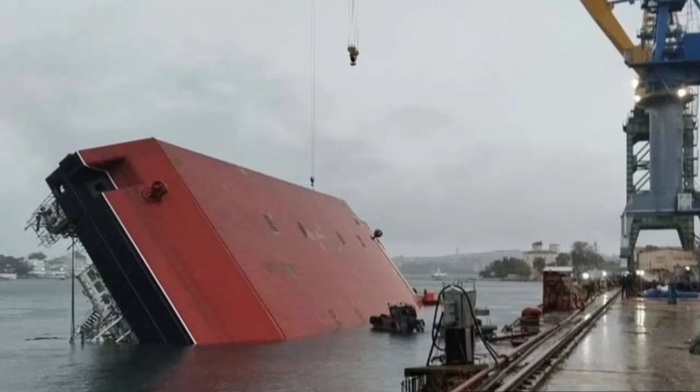October 27, 2025. Sevastopol's Yuzhnaya Bay lay calm as the PK-700 crane, a colossal steel giant worth $92 million and meant to serve the nation's nuclear fleet, began an inexplicable, slow tilt. 10 minutes later, it was gone, submerged, with chaos erupting on shore and key workers trapped beneath.

Was this a tragic accident, industrial neglect, or something hidden in plain sight? What truly caused Russia's most expensive maritime disaster in years?

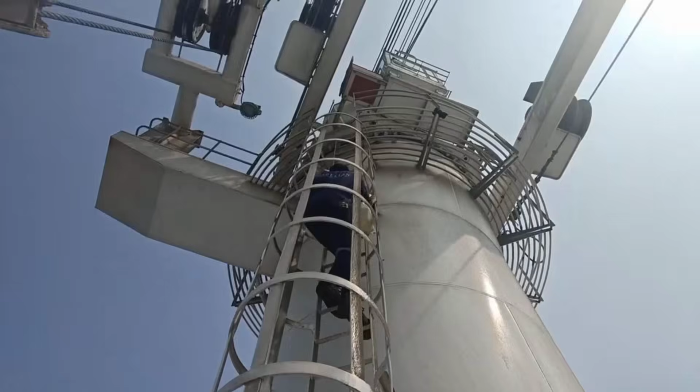At 3:30 in the afternoon, the PK-700 floats steady in Yuzhnaya Bay, its steel hull reflecting the pale afternoon sun. On board, workers and engineers move through routine checks, unaware of the slow change underway. The first sign is subtle, a gentle list, barely noticeable to those on deck. A dockside camera catches it, the waterline creeping higher against the port side, just a few centimeters at first.

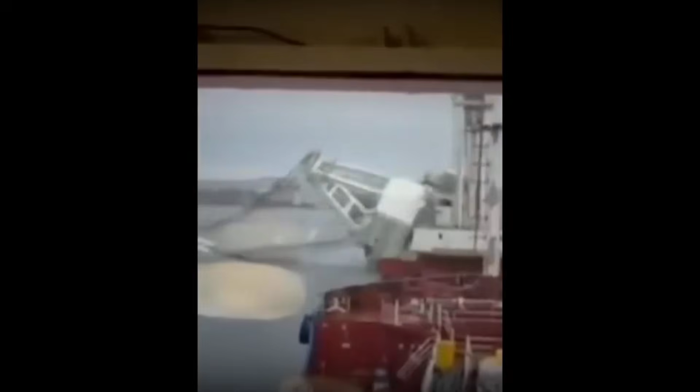By 3:32 in the afternoon, the tilt has grown. Eyewitnesses on the pier trade glances as the crane's tower leans further from vertical. One man shouts, pointing at the growing angle. The 350-ton test load still hangs from the crane's main hook, suspended over the bay.

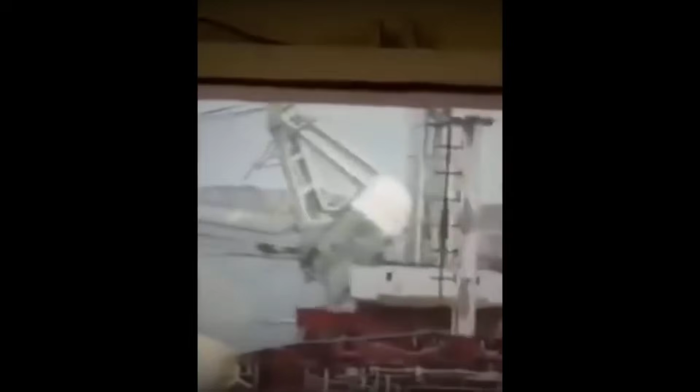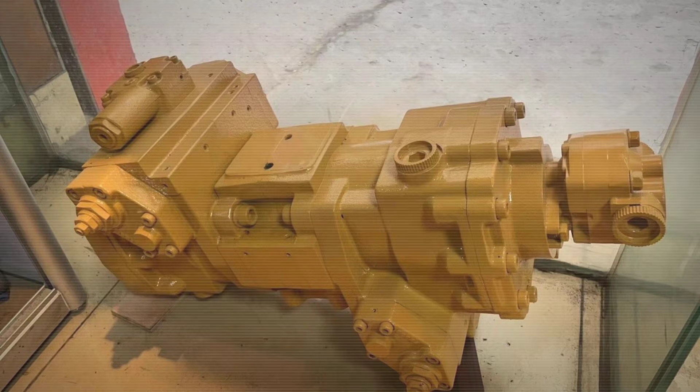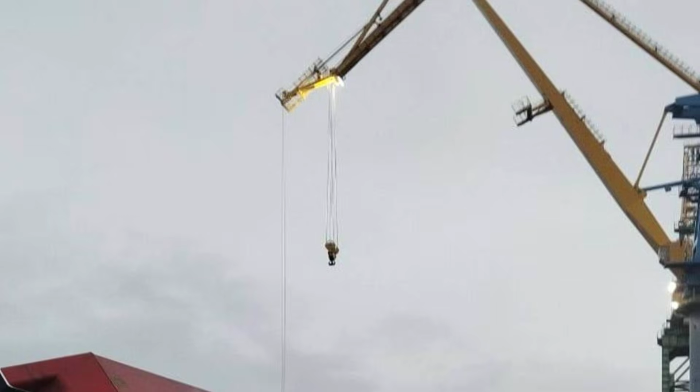Crew members step back from the edge, some pausing to stare at the horizon as the sensation of movement becomes unmistakable. At 3:34 in the afternoon, alarms begin to sound. The list accelerates. On the upper deck, a technician grabs a radio, calling for instructions. Below, in the machinery spaces, the hum of pumps is interrupted by the metallic groan of shifting ballast. The vessel's massive tower, designed to lift submarines, now works against its own stability.

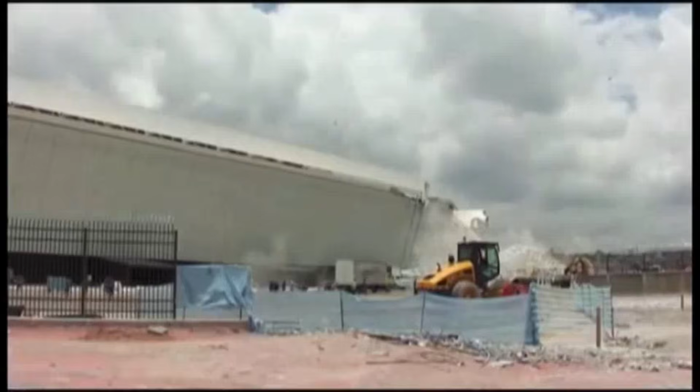By 3:36 in the afternoon, the tilt is visible from across the harbor. Cell phones come out. Some workers scramble across the sloping deck, bracing themselves against railings. Dock workers on shore move back, shouting warnings. The angle of heel now exceeds what any observer would call safe. The test load still dangles, swinging slightly as the vessel's orientation changes.

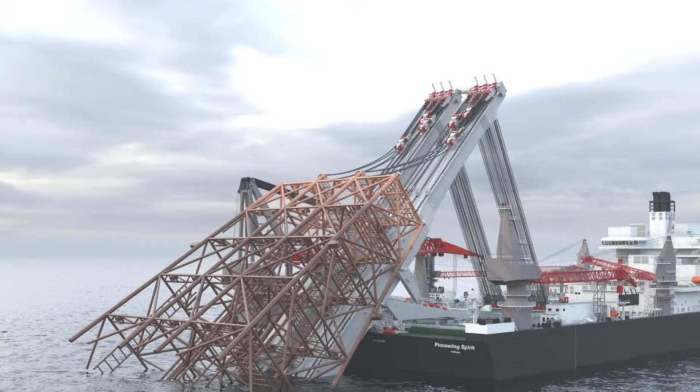At 3:38 in the afternoon, the list passes a critical threshold. The deck is at a steep angle, and movement on board becomes dangerous. Eyewitnesses describe the sound of metal creaking, a deep, resonant warning. Crew on the main deck begin to abandon their posts, some slipping, others helping colleagues reach ladders and gangways.

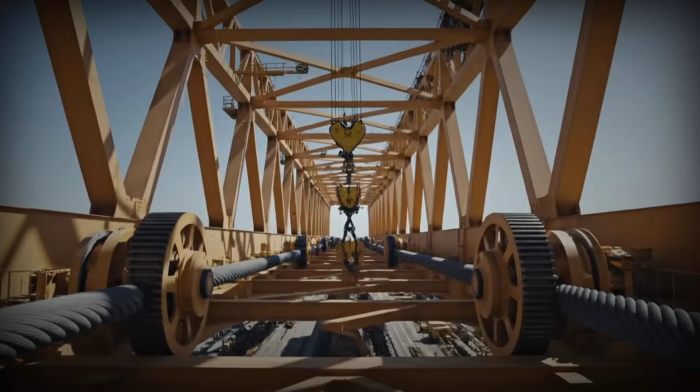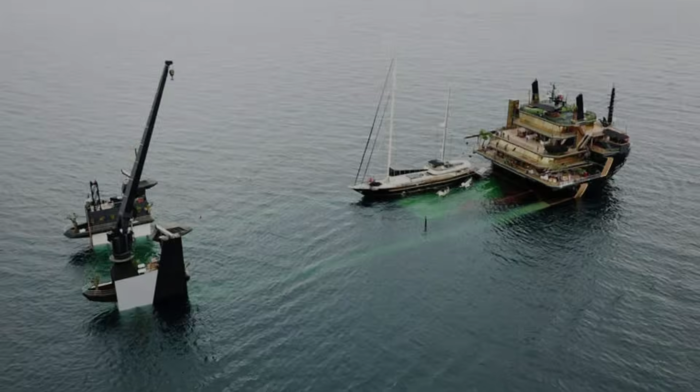At 3:39 in the afternoon, the inevitable happens. The massive tower, once upright, crashes into the water with a deep, echoing splash. A wave rolls across the bay, slapping against the piers and sending a spray over the nearest dock. In less than 10 minutes, the PK-700 has gone from routine testing to disaster.

The harbor fills with the sound of alarms, shouts, and the distant wail of approaching sirens. The vessel's steel hull, now half submerged, becomes a stark silhouette against the calm water. Onlookers, silent and stunned, watch as chaos unfolds in the heart of Sevastopol's naval yard.

Within seconds of the tower's crash, the pier side erupted in confusion. Shouts rolled across the water as onlookers, including dock workers, shipyard staff, and a handful of naval conscripts, strained to make sense of what had just happened. The air filled with the sharp crackle of radios as Port Authority dispatchers relayed urgent calls for assistance.

A flurry of small craft, some barely more than skiffs, pushed off from the wharves, engines sputtering as crews steered toward the half-submerged hull. On the quay, a cluster of engineers and supervisors gathered, their faces drawn and pale. Some pointed toward the listing crane, gesturing wildly as if hoping to reverse the disaster with sheer will. Others fumbled for their phones, calling colleagues or recording the aftermath in stunned disbelief.

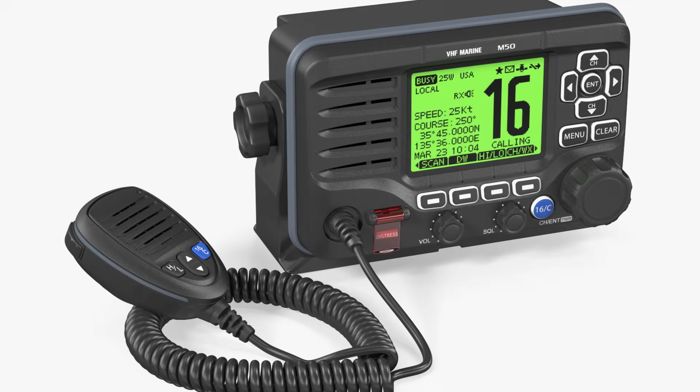The bay, moments before calm, now churned with the wakes of rescue boats and the distant wail of sirens threading through the harbor haze. Radio traffic grew dense. Port officials barked orders for all available vessels to assist. A tug captain's voice, thick with urgency, cut through the static.

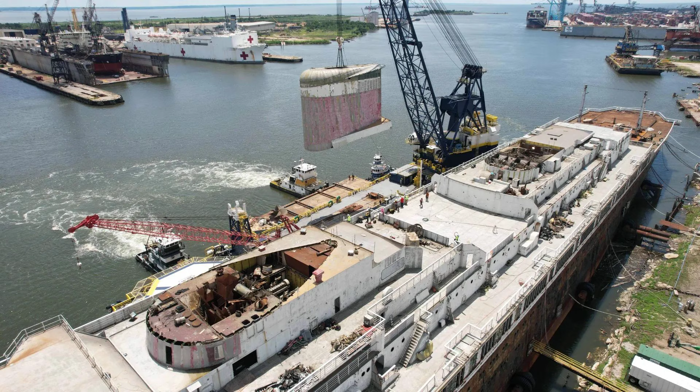"All hands prepare for recovery. There are people in the water."

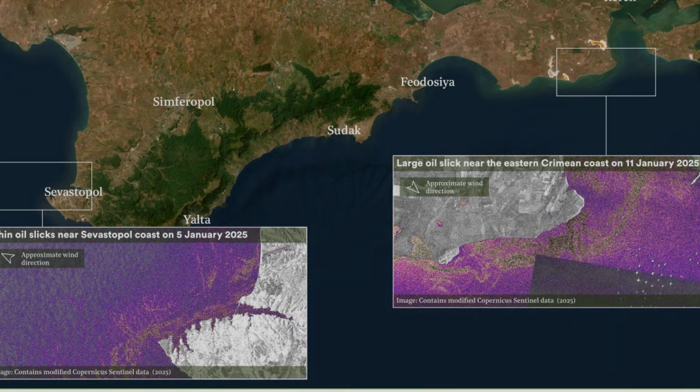The first responders, a mix of harbor police and shipyard crew, reached the scene within minutes, weaving between drifting debris and oil slicks spreading from the hull. Some boats circled cautiously, searching for survivors or anyone clinging to the twisted railing. Others drew up alongside the wreck, their crews calling names and scanning the water for movement.

On the shore, groups of workers stood frozen, some clutching hard hats or jackets, others simply staring. The spectacle of the massive crane lying broken in the bay seemed impossible to process. Rumors rippled through the crowd, questions about sabotage, a freak accident, or something worse. But there was little time for speculation as emergency vehicles crowded the access roads, blue lights flashing while paramedics and fire crews rushed to the water's edge.

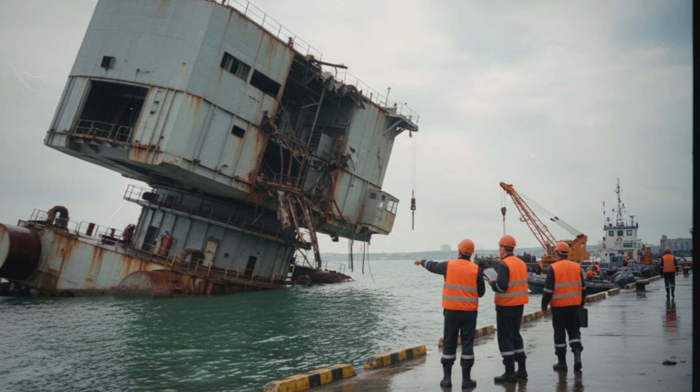The sense of order that usually governed the naval yard had vanished. In its place was a raw, unsettled energy, with people running, shouting, and improvising as they tried to help. No one yet understood what had caused the collapse. In the chaos, the only certainty was the scale of the disaster, and the knowledge that nothing in Sevastopol's harbor would be the same again.

Construction of the PK-700 Grigory Prosyankin began in November 2018 at Sevastopol, a shipyard with roots stretching back to the days of the Russian Empire. The project launched with high expectations, a heavy lift vessel designed to support the Black Sea Fleet's most demanding operations.

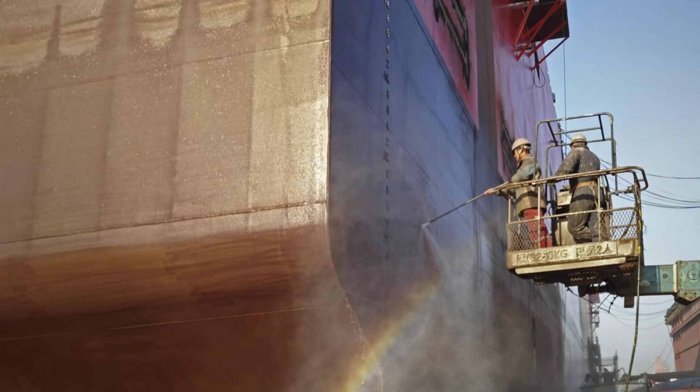But by early 2025, after 7 years of fits and starts, only about 65% of the crane was finished. The hull, meant to gleam with fresh paint, instead wore streaks of rust. Patches of primer showed through along the deck, and unfinished welds traced the outlines of missing modules. What was supposed to be the pride of Sevastopol harbor became a daily reminder of missed deadlines and broken promises.

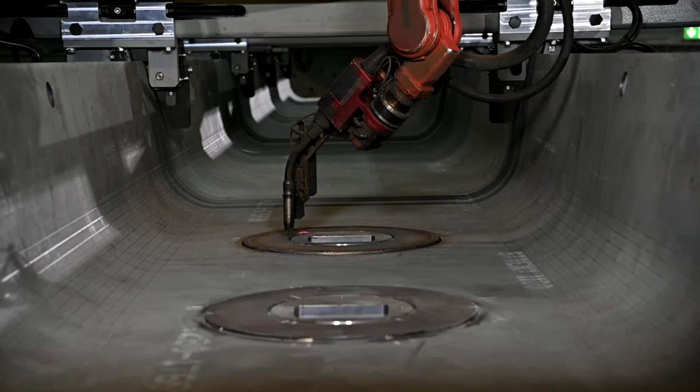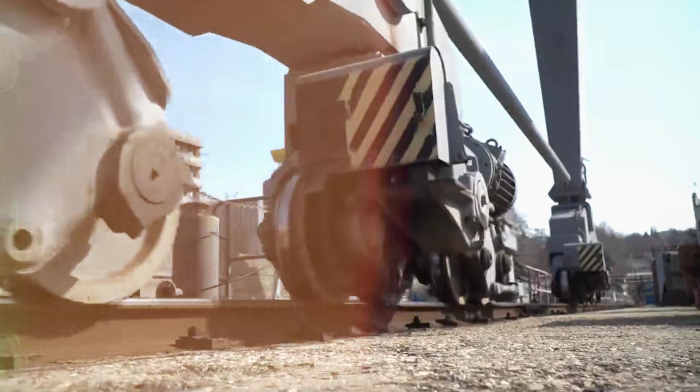Inside the shipyard, engineers and laborers faced a revolving door of problems. Funding arrived in unpredictable bursts, often too late to secure critical components. Official records show that between 2019 and 2024, the project halted at least 3 times for lack of materials or overdue payments. Each pause brought layoffs and departures. Experienced welders and electricians left for more stable work, taking their expertise with them.

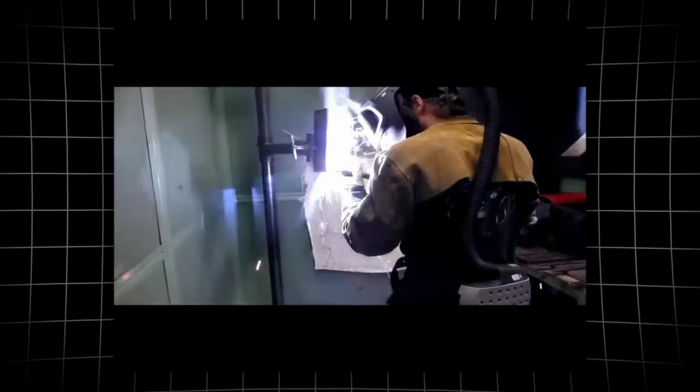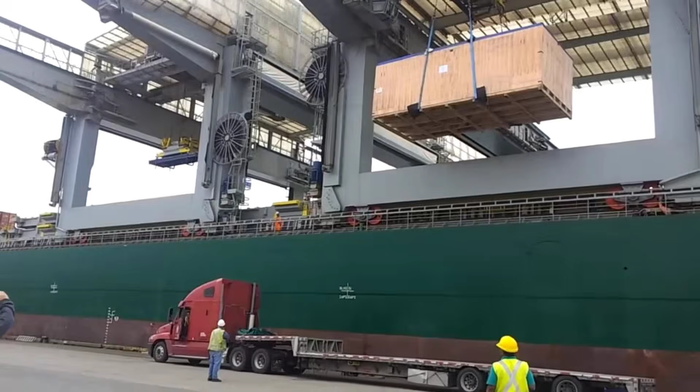By 2023, internal memos described the workforce as stretched thin and constantly changing, with new hires learning on the job under pressure to catch up. A shipyard engineer who agreed to be interviewed described the atmosphere in blunt terms. They said they were always behind. Every month, another deadline. Parts arrived late, or not at all. Sometimes they had to improvise repairs just to keep moving.

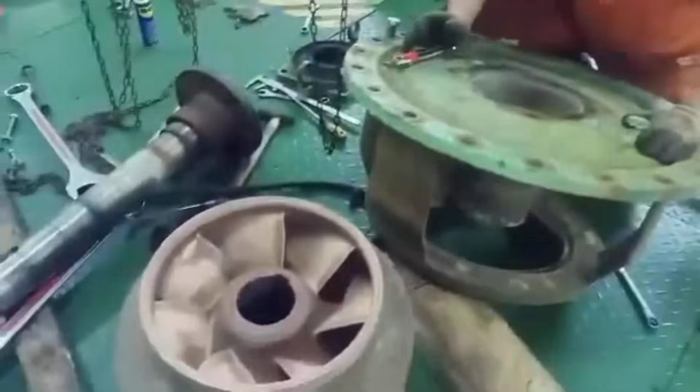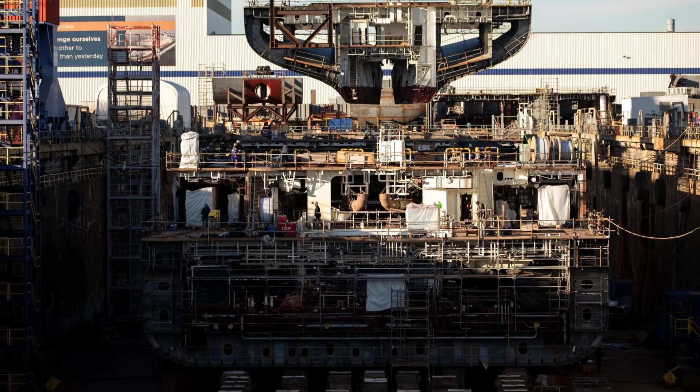It was never enough. Payroll logs from the winter of 2022 show overtime hours spiking, yet progress lagged far behind the official schedule. The engineer pointed to the ballast system as a particular worry. They said problems with pumps and valves had been flagged more than once. Maintenance was delayed because there were no spare parts, or the right people were not available. Those tanks were supposed to be checked and tested, but sometimes the paperwork was signed before the work was finished.

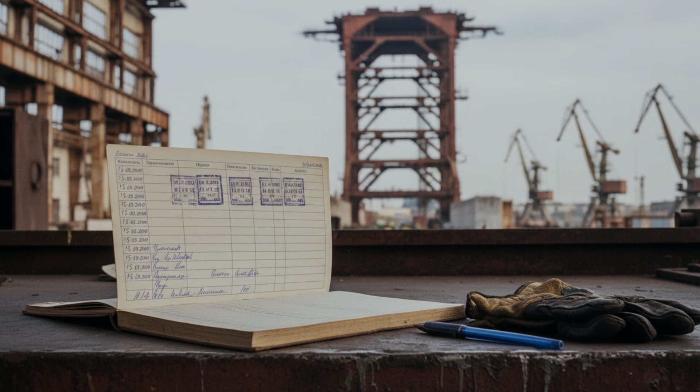Audit reports from the shipyard management confirm that safety milestones were repeatedly skipped or rescheduled. Project schedules from 2021 and 2024 highlight key safety reviews marked as incomplete or pending approval. In one instance, a pressure test for a ballast tank was delayed by 6 months, with no follow-up inspection recorded.

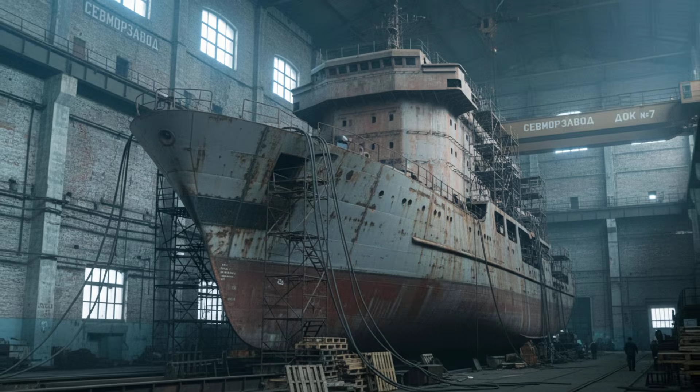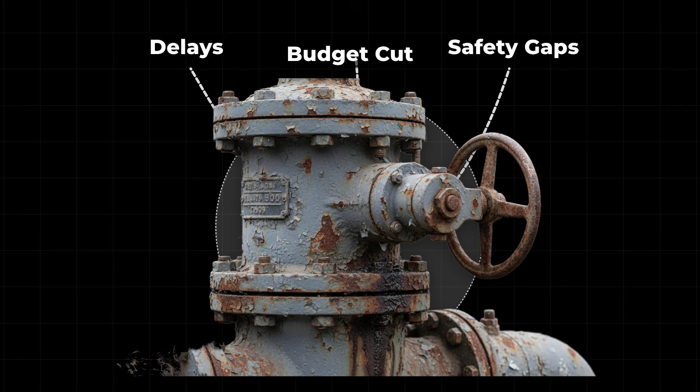By the time the PK-700 rolled out for its final round of tests, the vessel's unfinished look told its own story, a product of chronic underinvestment, a workforce in constant flux, and mounting pressure to deliver at any cost. The technical risk that haunted the project's early years would soon become all too real.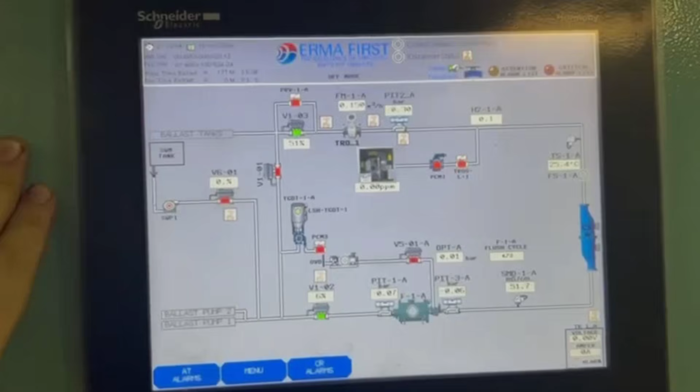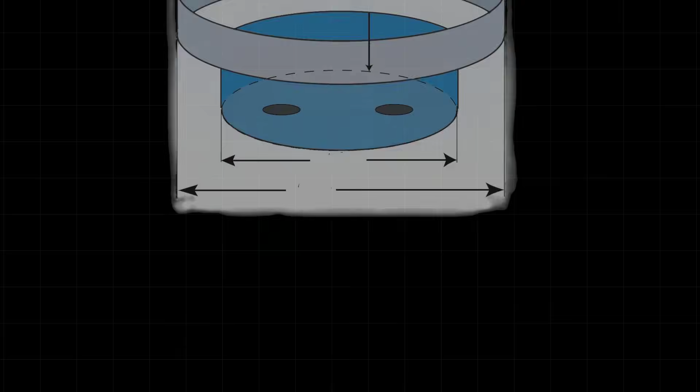But on October 27th, the system did not respond as designed. At 3:34 p.m., with the 350-ton load suspended, the first alarms sounded. The control panel flashed a warning. One of the main ballast pumps failed to activate when commanded. Operators initiated a manual override, but the display showed no change in tank levels. Ballast tank number 3, located on the port side, was supposed to fill rapidly to counteract the crane's heel. Instead, water remained trapped, and the vessel's list continued to grow.

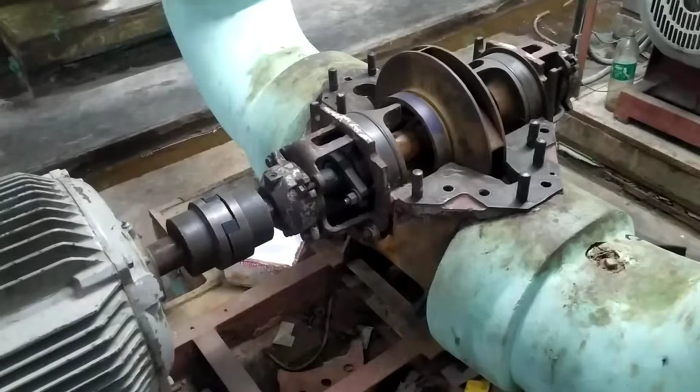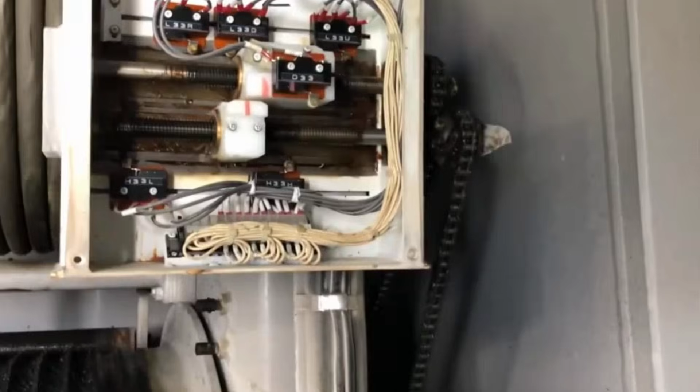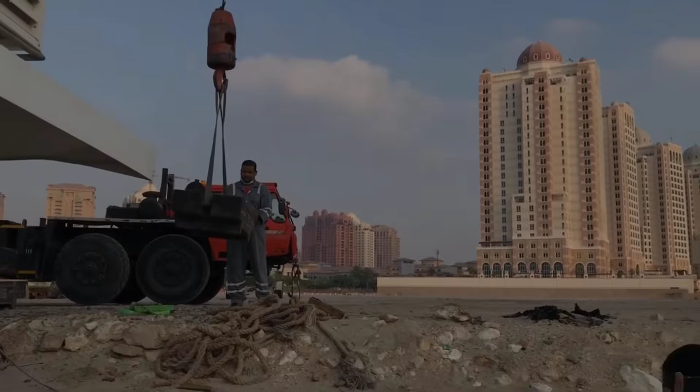Crew in the machinery spaces reported a metallic rattle from the pump housing, followed by silence, a sign that the motor had stalled or the valve was stuck closed. For the next 90 seconds, the control team cycled switches and radioed engine room staff to check fuses and circuit breakers. The vessel's programmable logic controller logged repeated attempts to start the pump, each ending in a fault code. Meanwhile, the angle of heel increased past safe operating limits.

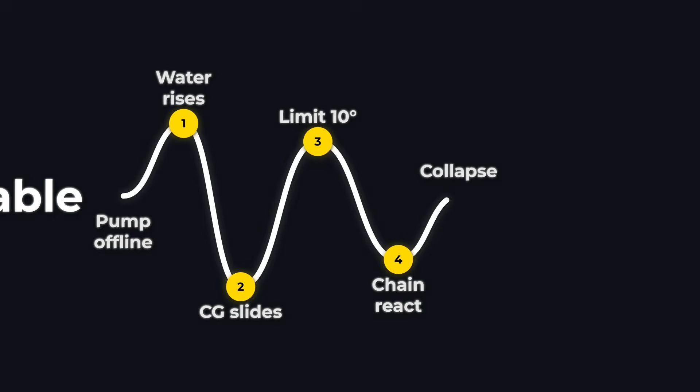Standard procedure called for immediate test suspension and rapid lowering of the load, but the shifting center of gravity left no margin for error. The suspended block, acting as a massive pendulum, pulled the vessel further off balance with every degree of tilt. On deck, technicians could feel the change with each passing moment. The floor beneath their feet slanted more sharply, and the sound of water sloshing inside the hull grew louder. The vessel's righting moment collapsed as the imbalance worsened.

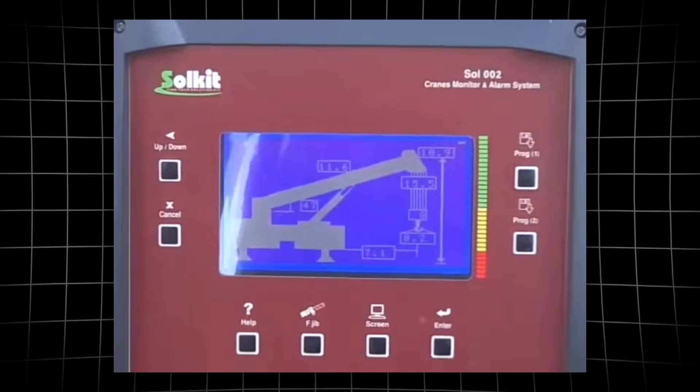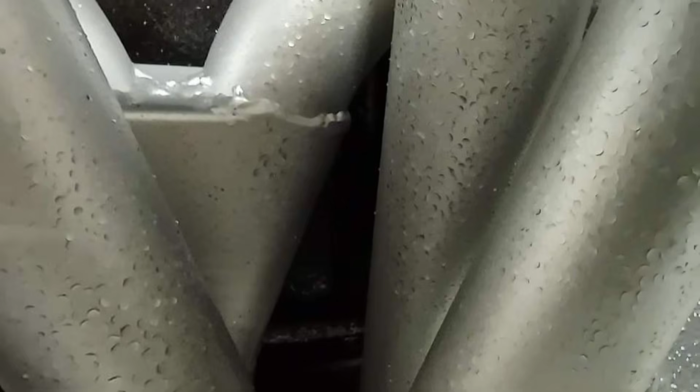In the control room, one operator shouted over the alarms, demanding the test be aborted. But the system's feedback remained unchanged. Tank number 3 was not compensating, and the vessel's fate was sealed. By the time the tower crashed into the bay, the mechanical cause was clear: the failure of a single ballast pump, combined with the inability to redistribute water, allowed the center of gravity to cross the point of no return.

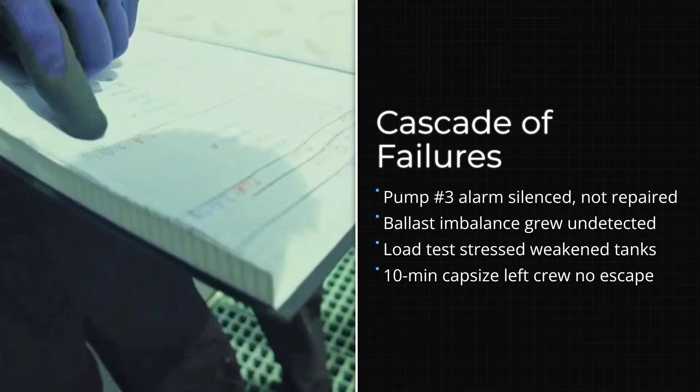Within minutes, a technical anomaly had become a full-scale disaster, traced to a system that had been flagged for maintenance delays and incomplete checks. The machinery logs, alarm histories, and schematic overlays would later become central to the official investigation. But for those on board, the disaster unfolded in real time. One failed pump, one stuck valve, and no way back.

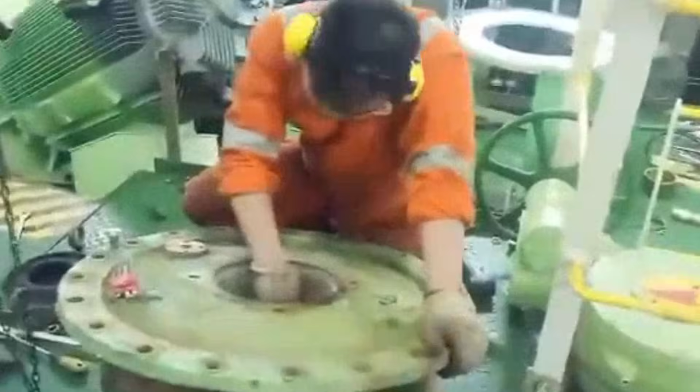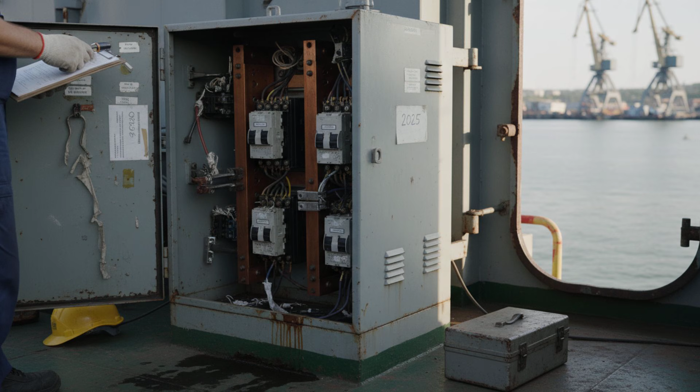Two men did not return home that evening. The electromechanic, a veteran of Sevastopol's workshops, was last seen below deck, working near the main power distribution cabinet. The sailor, assigned to the crane's maintenance crew, had been preparing emergency gear in the machinery space just minutes before the alarms sounded. As the vessel tilted, both were trapped beneath heavy steel and rising water.

Their names quickly spread through the shipyard. Colleagues described them as steady hands, men who understood the risks of unfinished machinery, but showed up every day regardless. On deck, chaos reigned. Over 20 workers scrambled to escape the slanting surface, some slipping into the cold bay, others helping injured co-workers toward the rails.

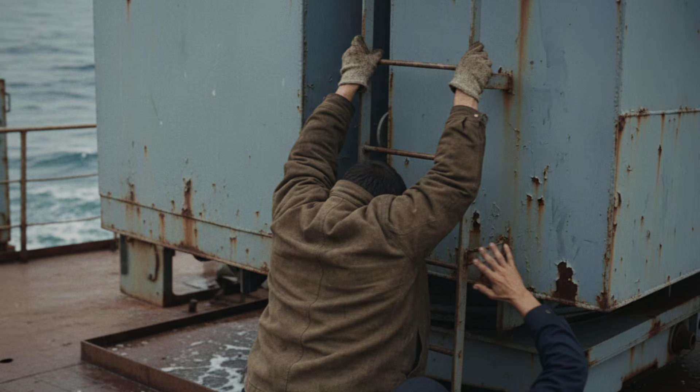Seven were taken by ambulance to the city hospital, suffering broken bones, deep bruises, and shock. A survivor, his arm in a sling, later told local reporters that there was no time to think. The floor was moving, alarms everywhere. He remembered grabbing a friend's jacket, pulling him up the ladder. Then the water came in.

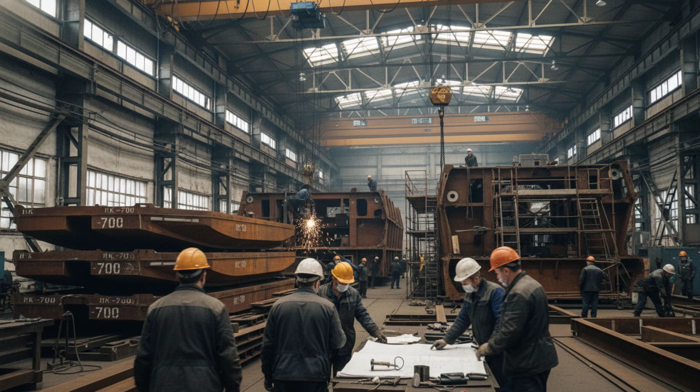Family members gathered at the hospital's entrance, searching for news amid the confusion. The wife of the electromechanic, her voice trembling, recalled the last message she received, a brief text promising he would be home for dinner. In the days that followed, union representatives and city officials offered condolences, but the sense of loss ran deeper than words.

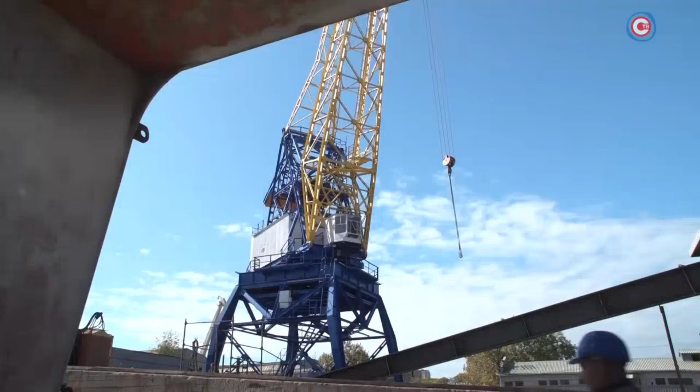The disaster was not just a technical failure, it was a rupture in the lives of dozens of families, each grappling with the sudden absence of a father, brother, or friend. For Sevastopol's shipyard community, the cost of the PK-700 collapse will be measured not in steel or rubles, but in empty chairs and unanswered calls.

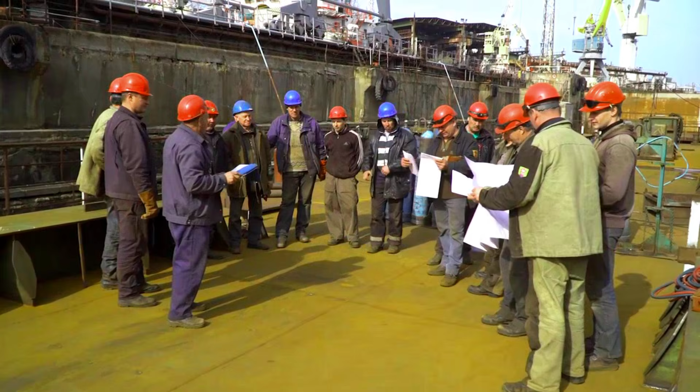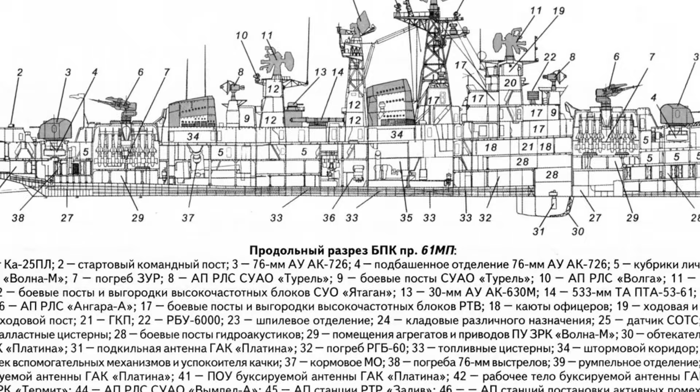On October 29, 2025, investigators from the Russian Investigative Committee arrived at the Sevastopol shipyard, carrying sealed folders and a mandate to uncover what went wrong. Within hours, the collapse of the PK-700 was no longer just a workplace tragedy. It became a criminal case. The lead investigator, a veteran of industrial accident probes, began with the paperwork.

Inspection checklists for the ballast system showed missing signatures and incomplete test records. Several safety milestones, required by maritime regulations, were marked pending or simply left blank. Maintenance logs for the failed pump referenced repairs that were scheduled but never carried out.

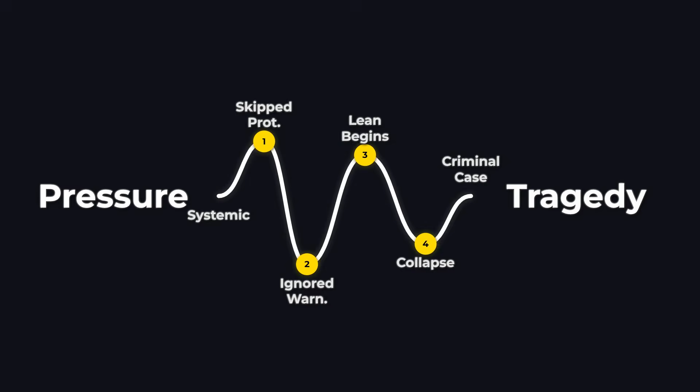Statements from the engineering committee revealed a pattern: pressure from above to meet revised deadlines, even if it meant skipping protocols. Internal memos, later obtained by the authorities, documented warnings about the ballast tanks and the risk of running tests without full system verification. One memo dated just 10 days before the disaster cautioned against proceeding with the load test until all safety checks were completed.

It went unheeded. By the end of the week, the committee issued a preliminary finding. Negligence, not sabotage or outside interference, had set the disaster in motion. The criminal inquiry focused on shipyard management and commissioning officials who authorized the test despite unresolved technical concerns.

Official statements pointed to a technical anomaly, but the documents told a clearer story. Corners were cut, and the cost was paid in human lives. The investigation findings would soon shape the course of salvage and recovery, and determine who would be held to account for the loss in Sevastopol's harbor.

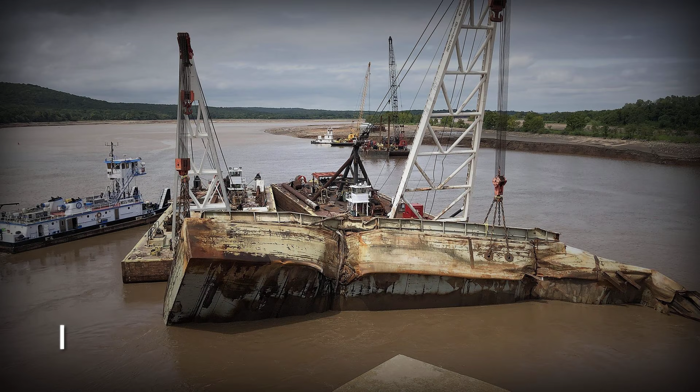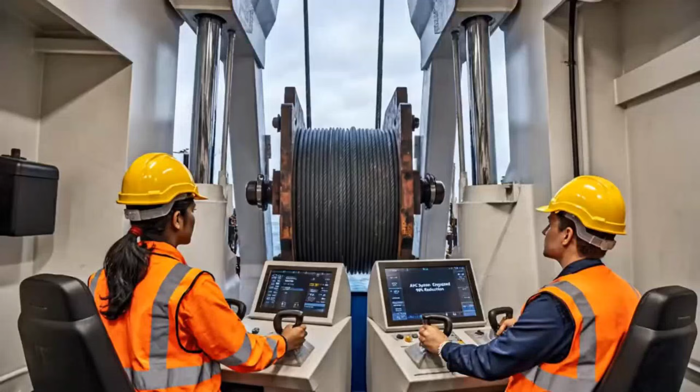The half-submerged hull of the PK-700 now sits across Yuzhnaya Bay, a steel barrier blocking the main channel for naval traffic. Salvage crews, led by veteran marine engineer Yuri Malyushev, began work before dawn on October 29th. Heavy barges and floating cranes were brought in from as far as Novorossiysk, their crews tasked with cutting through twisted beams and lifting the toppled tower section by section.

Divers in cold-water suits mapped the wreck's underside, searching for structural weak points and hazardous leaks. Each step is slow and costly, with industry analysts estimating the operation could reach $12 million, though Russian authorities have released no official figures. The financial blow does not end at the water's edge.

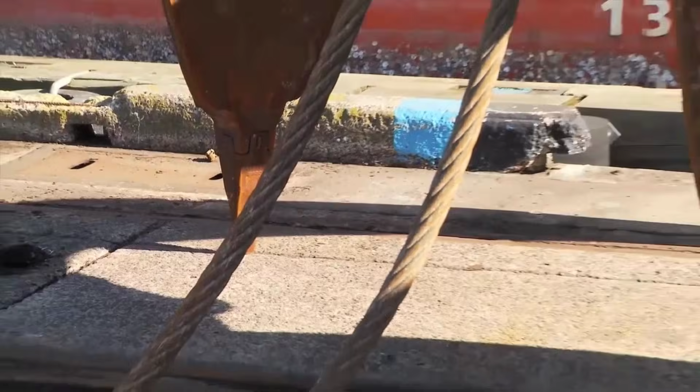Defense sector observers estimate the total loss at over $90 million, combining sunk construction costs with the mounting price of recovery and environmental cleanup. For a Navy already under economic strain, the destruction of a $75 million asset, never once put to use, represents a setback that ripples far beyond Sevastopol.

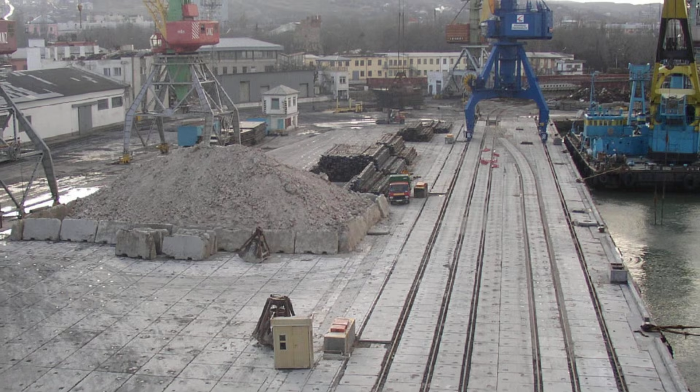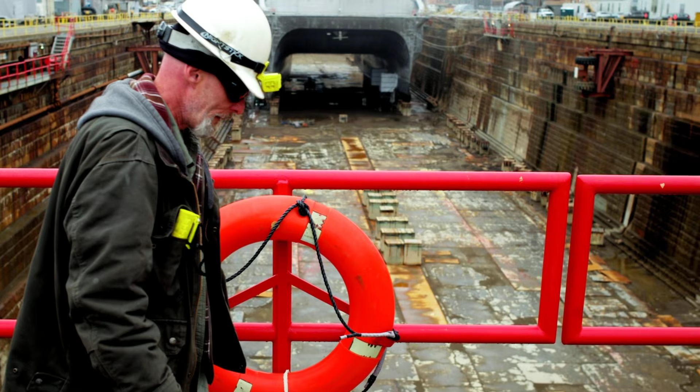Naval analyst Svetlana Kravtsova notes the operational fallout. With PK-700 gone, the Black Sea Fleet loses its only crane capable of lifting nuclear submarine modules or major warship sections. Scheduled maintenance on Borei-class submarines, once planned for the coming winter, must now be postponed indefinitely. Without a suitable replacement, the fleet faces a backlog of essential repairs that could stretch 1 to 3 years.

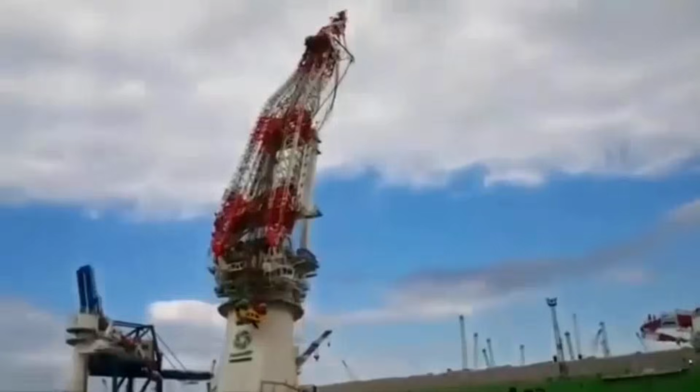Older cranes, some dating back to the 1980s, are being pressed into service, but they lack the capacity for the heaviest lifts. The bay remains partially blocked. Salvage teams work around the clock, but the logistical bottleneck grows with each passing week. No new procurement contracts have been announced, and the Navy's maintenance schedules, once detailed and routine, are now blank where PK-700's name once appeared. The loss is not just a matter of steel and budget lines.

It is a strategic wound, leaving Russia's most advanced submarines waiting in line for repairs that may not come anytime soon. A single technical lapse now blocks an entire fleet, proof that shortcuts cost more than time. As Russia's shipyards age and pressure mounts, safety standards face constant compromise. Today, the PK-700's wreckage still clogs Sevastopol's harbor, a daily reminder that infrastructure neglect is not just a local problem, it is a global warning. What price will be paid the next time critical maintenance meets a deadline?